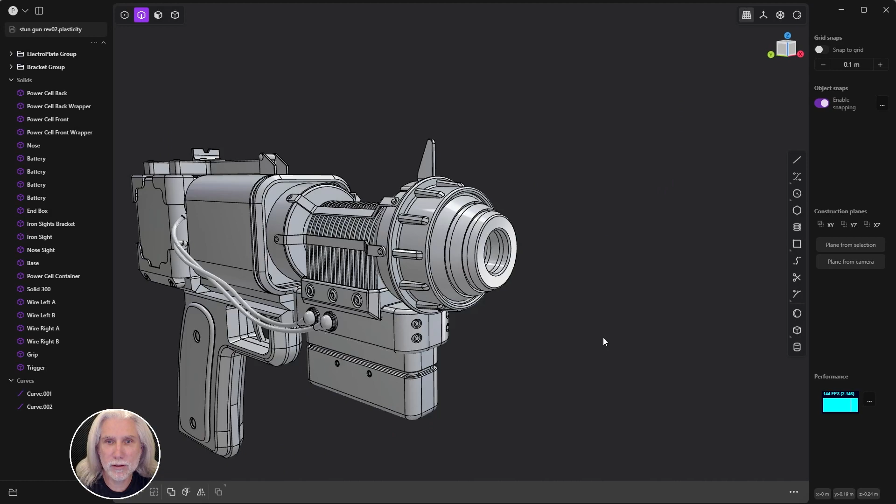This is the final model we're going to be making in this tutorial. I've divided this up into about 7 different half-hour sections. I know that's a lot, but a half hour at a time is plenty. I usually get through one or two of these components per session. Altogether it's like a day. So if you're just learning Plasticity and want to spend a day on a tutorial series, this is a good one for you.

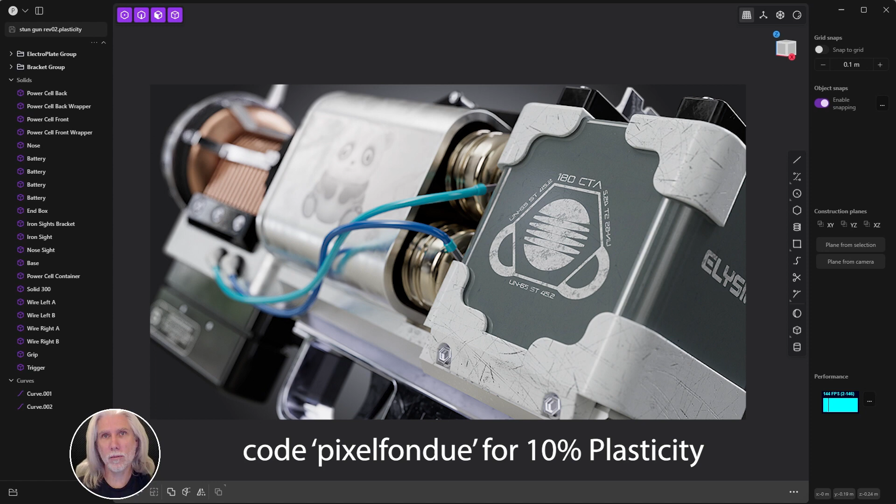Okay, so let's work on those brackets, those side brackets. What's the best way to do those? You'll notice there's this piece here, and then the same piece on either end, connected by diagonal pieces of metal. All right, I think we can do that.

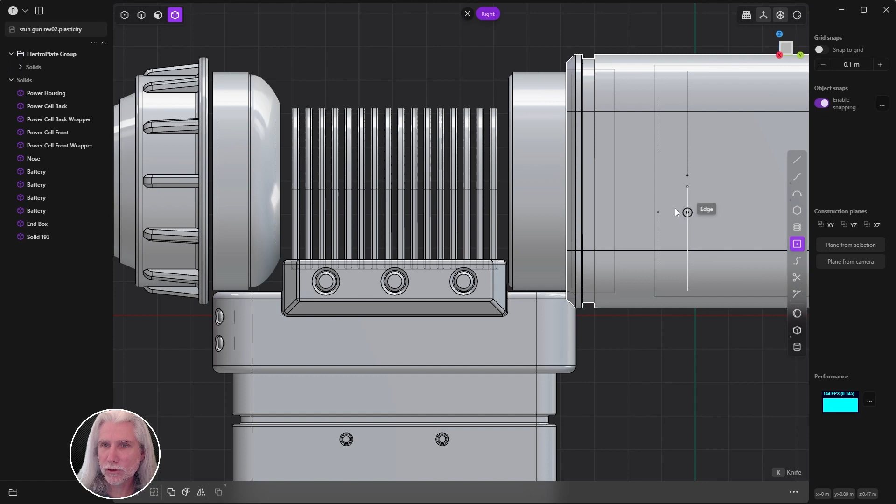Let's go back to Plasticity and look at it from the side. Press 3, and I'm going to go to a center rectangle. Let's see if we can hover over here until it snaps to the center of this guy, just lining it up. Click and drag it out a little bit, just getting a rectangle as a starting place. Hit enter, and you can see the little rectangle here.

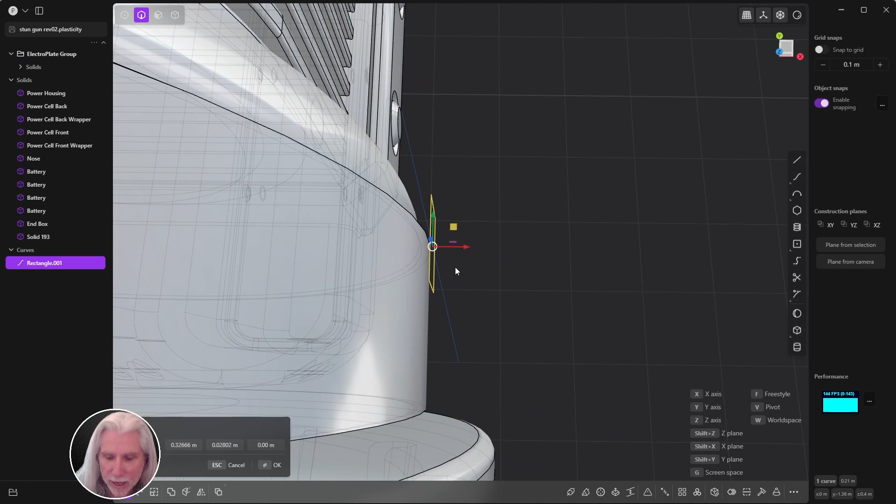Then I'll press 1 to get the vertices, press G and move it over a little bit. Enter, and then G again, something like this. Let me press 2 to get the whole rectangle. I'll go to the top view and move it out to the edge, maybe over the edge a little bit, something like that. Looking at it from the top, you can see what it looks like.

From the side, I'll press 1 and G and lengthen those out a little bit. Then press 2 and select the whole thing, Shift D to duplicate. Now I've got another one, and I'll move this all the way over to this side. Actually, let me Control Z, undo that. Let's Control D to duplicate it and move it over to the middle — this is going to be our middle one.

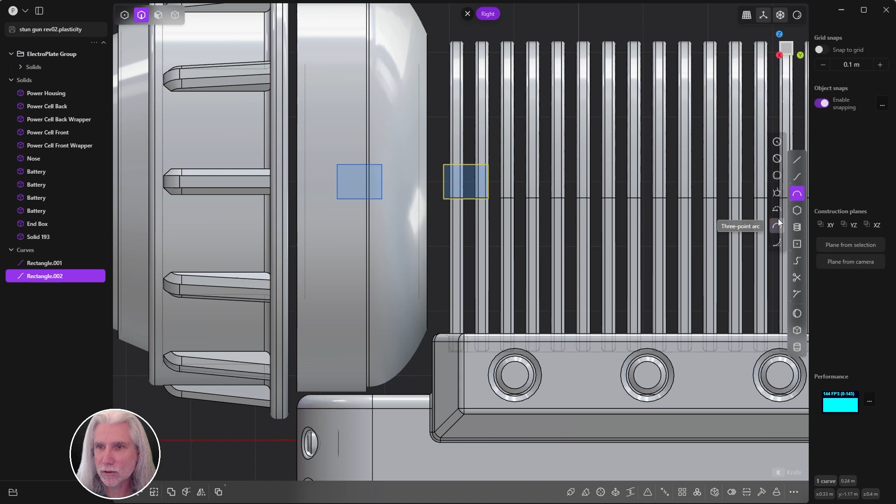Then I'm going to finish up this side with an arc. I'll click on my arc tool here — click and hold, you can see all these tools. Let's do the 3-point arc. Click once on that dot, click once on this dot, then click and drag up to get a nice little arc there, looks like a basketball key. T will give us our scissor tool, and we'll chop out that middle line and hit OK.

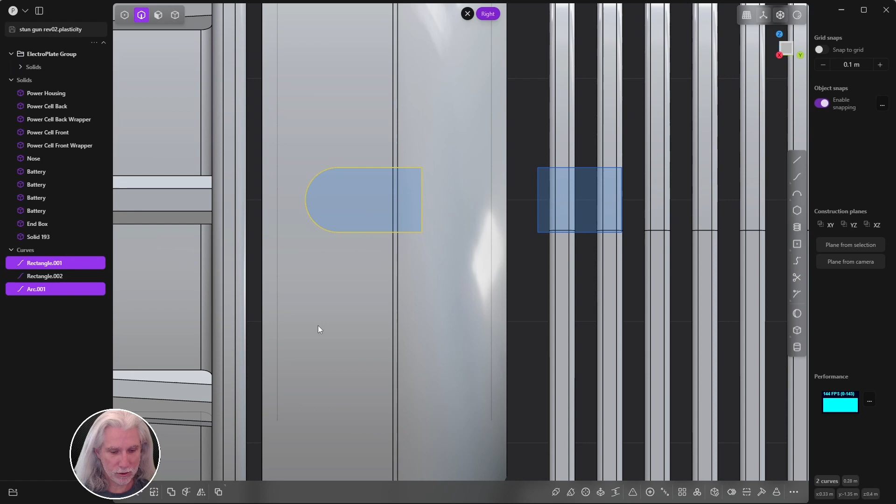Then press 2 for curve selection, select both of these, and J for join. You'll see these 2 become 1 here — J for join, now that's just 1.

Then I'm going to Alt X, which gives me my mirror tool. I'll press F for freestyle, click and drag down, and you'll see it appear over here. Whoops, you don't want it at an angle, so let me press period for isolate — this is a little bit easier. Alt X for mirror, and you'll see the mirror axis is way over here. So we'll go F for freestyle.

I'm just going to click and drag down to create my axis, just like that, and get one on this side. So now I've got two of them. Then I'm going to get out of isolated mode by clicking that.

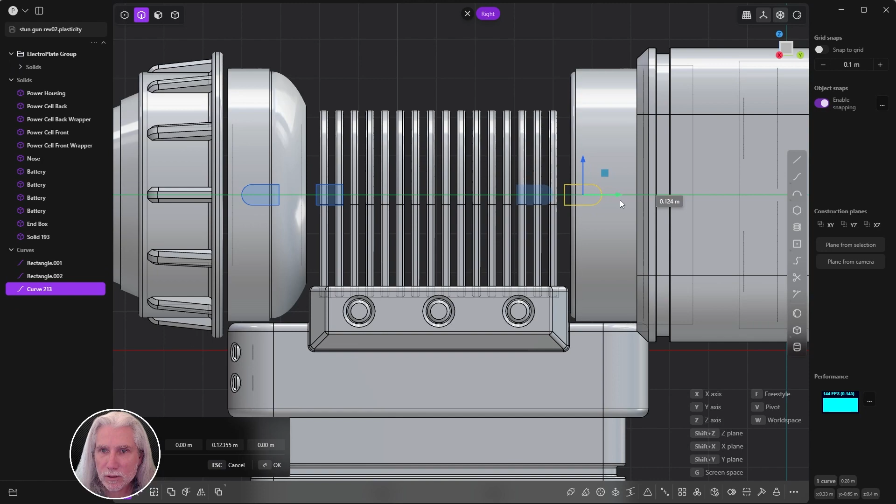Let's select this one that we duplicated here and press G and move it over, so it's a little bit like this, maybe like that, just sort of overlapping that edge.

And then our middle one here, this rectangle, let's look at it from the top, press 7, and we're going to press G to move it a lot closer, and in a little bit, but a lot closer to these metal plates here. So something like this, we'll just maybe test that for now, maybe in just a little bit.

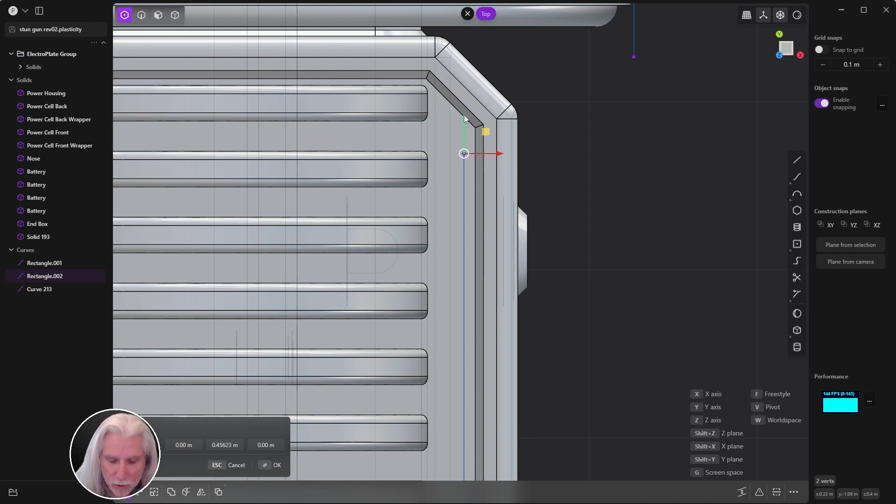We have to connect it to this outside one here, right? And then 1 for control vertices, G, move it over, again just sort of looking at it from the top, just kind of even with the second to last one, I guess. Something like that. Okay, looks good.

And now we can press 3 and select all of these sort of pseudo faces like this. Our extrude tool comes up automatically. Let's look at it from the top maybe, and I'm going to extrude out this way a little bit. So not a ton, it's pretty thin, just something like this. And hit enter.

Now we've got 3 bodies here, right, 1, 2, 3. I don't need these curves anymore, so I'm going to delete them. And now we need to connect them, so I think I'm going to...

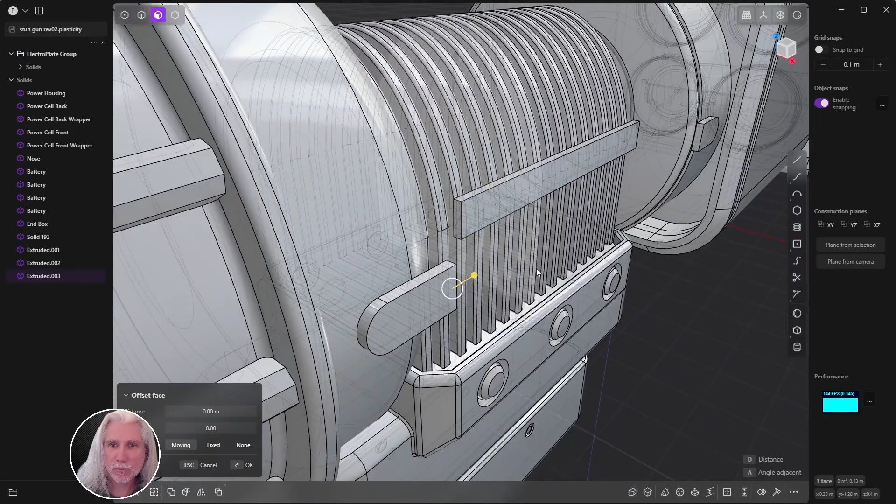Press 3 and push this one out a little bit more this way. Now with this still selected, let's shift select that face. We have 2 faces selected.

And I'm going to loft these together. It's kind of like bridging in Modo or Blender if you use the bridge tool. This loft is going to create geometry between these 2 faces. So down here, it's the L key, or you can click this little loft button, click like that, and you see you've got this nice little curvy thing there, right?

Now if I look at it from the top, you can see the curve a little bit better. In fact, we're not intersecting with this, which is what we want, but I'm not sure I want this curve. So I press period again to isolate, and then it seems to have cancelled that command, so press L again and get that loft.

Over here we have our continuities, and this will help us determine the curviness of it, so I can adjust the tension. I can click and drag, and you can see that tension sort of moving in and out there. One from this one right here will be the tension of this side, so you can see what I'm doing, and this one is the tension of this side.

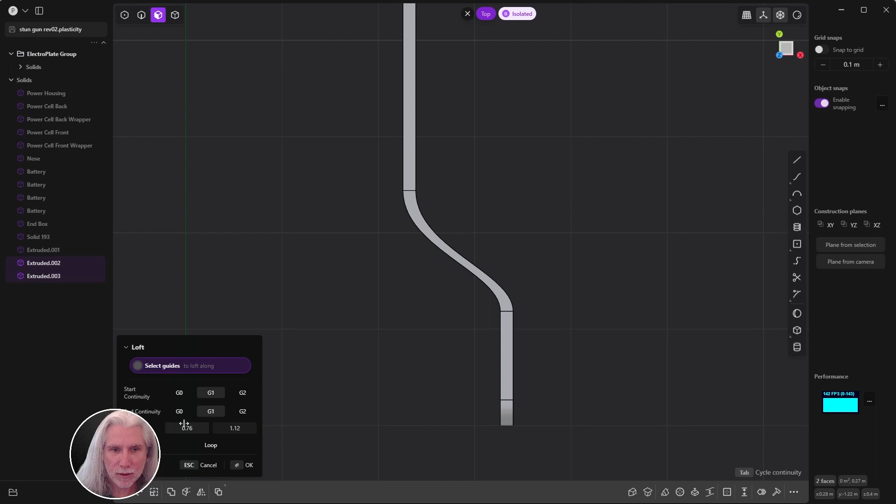But I think I want it straight, so you can do these sort of built-in ones, G1, G2, like this, or you can go G0, which is just linear, like that. And I think I'm going to go linear, and then we'll do a little bit of a fillet later on. So hit OK.

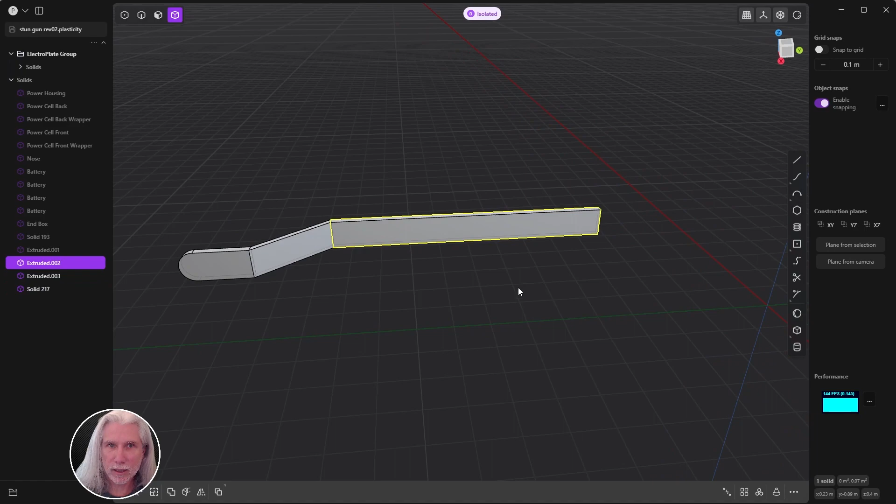So now we've got this, it created a new solid, it didn't connect the solid. So now we've got multiple solids here. We've got, press 4, we've got this solid, we've got this solid, we've got this solid. And when we get out of isolation mode here, we've got this solid, right?

So we're going to do the same thing over here. Press 3 for face, select this face, select this face, L for loft. Boom, gives us the sort of curvy one. We want the G0 straight one like that.

Okay, enter. Now looking at it from the top, we've got our 2 lofts. I think that looks pretty good, and we just need to do a little bit of cleanup work here.

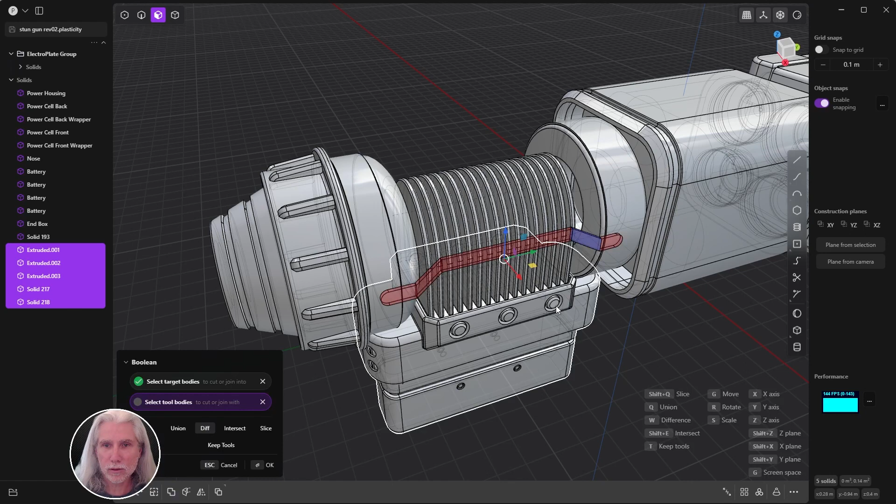So I'm going to grab all of these guys, so down here just shift select up and grab all of these guys. Oops, we don't want the bottom one. All of these guys here, and we're going to just QQ to Boolean union, QQ. And now it's all one piece.

Let's rename this bottom piece here, let's just call it like hand grip or something. I'm not really sure that's a hand grip or front grip.

I don't know, what is that thing? Front grip, we'll call it. Maybe you'll hold it like that.

So this guy here, let's just press period to isolate it, and 7 to look at it from the top. You'll notice that this is a little bit too thin here. Same over here, although it's a little bit better.

So let's just press 3, select these faces and just eyeball it. Look at it from the top maybe. You want this to be about the same thickness all the way across. So enter there, and then select this one. Look at it from the top and thicken that out a little bit so it's thick all the way around.

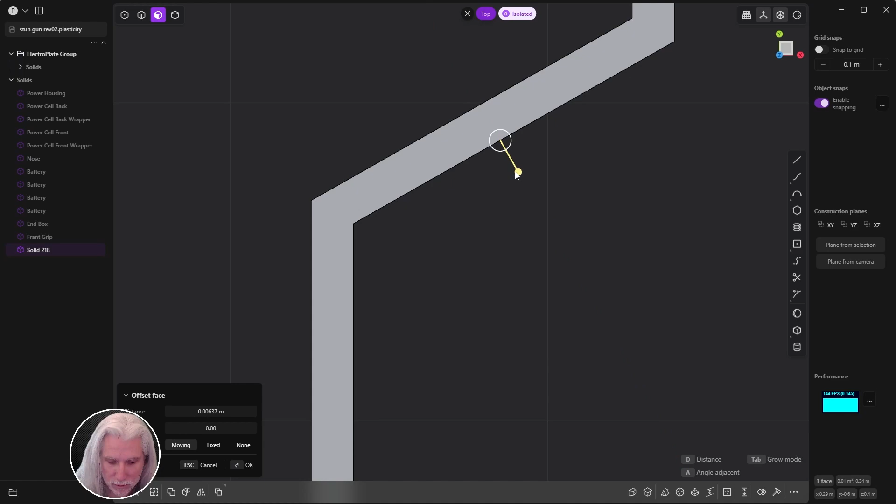Looks good. And now let's press 2 for edges. Let's grab these two and hold shift and grab those two and hold shift and grab these others. And we're just going to fillet these, just rounding out these edges a little bit, right? Just like that. So hit OK.

Looks good. We've got this nice little bracket here. We just need to cut some holes in it right here and right here, and then put in the little bolts, and then we'll duplicate it around.

So let's do that. I'm just going to look at it with 3 from the side, and come over here and create a cylinder. I'm going to hover here and push out, then look at it this way. Let's just sort of push it in like this.

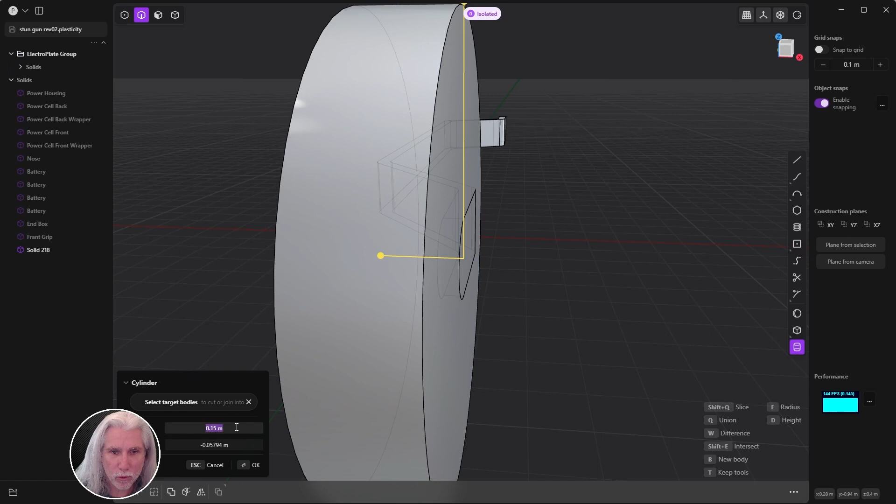Let's type in the radius, call it 0.15, like that, so we can get the same radius on the other side. Hit OK. Let's go to the other side.

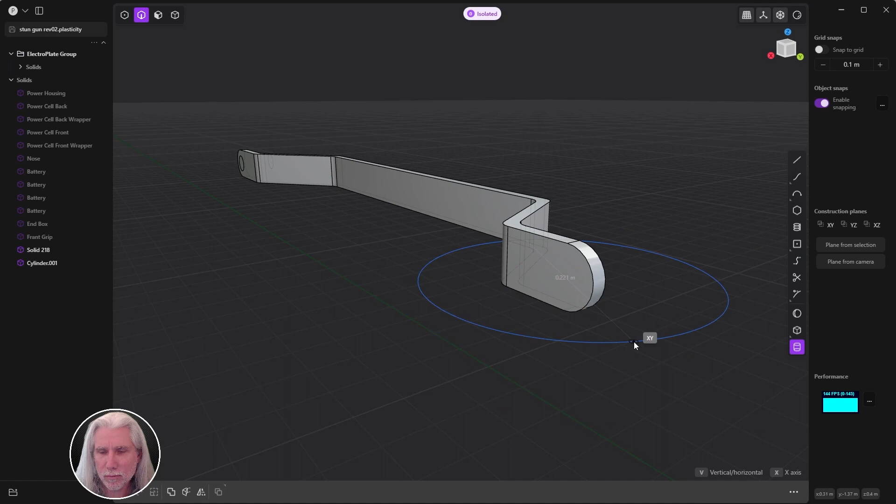Got our cylinder. Kind of hover over that little point there. Now you'll notice like on this side, it's rotated 90 degrees. I want it to be flat on this face and not parallel or perpendicular to it. So here's a way you can do that.

You can just select the face like that and then hit the spacebar, and you'll have this thing up here called a temporary construction plane. What that did is it just moved the whole grid, and it sort of transformed it onto that plane. So now our center of our universe, so to speak, is right there on that face that we had selected.

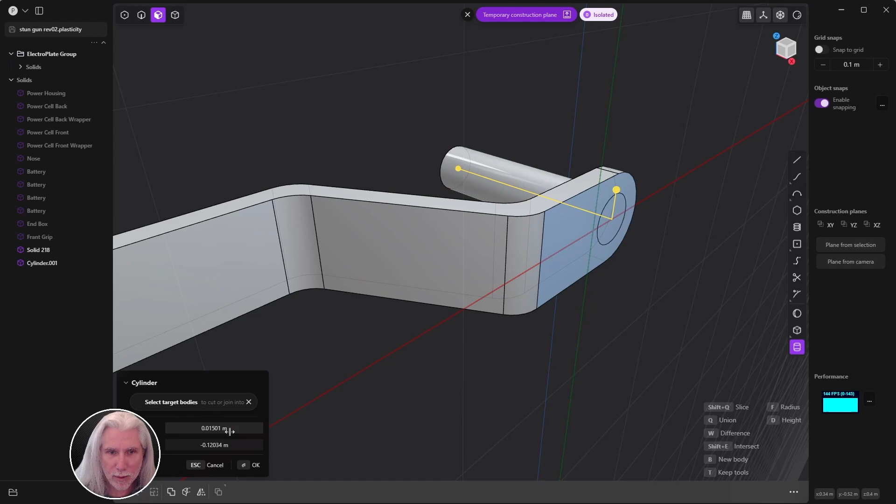And then when I go and make my cylinder here and just hover and click and drag, it's doing it correctly, and I'm going to drag out that way. I'm going to do a new body, just press B for new body. And remember it was 0.015 for the radius, so hit OK.

And so now we have these two guys here. In fact, you can press 4 for body and press G for move and just drag them both out a little bit. Enter, like that. And then to get out of this temporary construction plane, you could just hit spacebar again, or click the X here. We'll click the X, get rid of it. Whoops, let's get our perspective view.

Okay, so now we got two little guys here, and I'm just going to, on this one, press 3 for the face and push it up just a little bit like that.

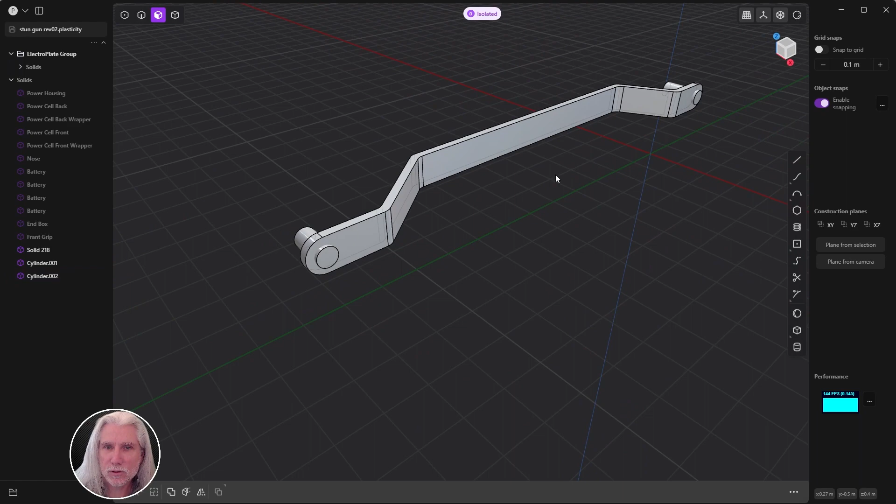Okay, so let's do some cutting. Let's grab 4 for our bodies, and then Q, and we're going to select this one, and then hold Shift and select this one, and it's going to chop our holes into it. And then we want to keep those cylinders because we're going to use them to create the bolts. I mean, why not? We already have them. So T for keep tools. You'll see it turn sort of milky pink. Hit OK. So now we've got holes in there.

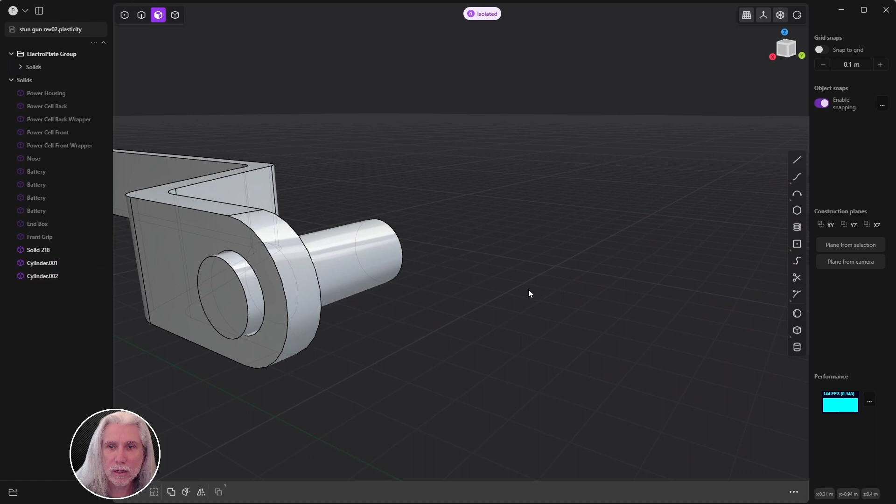And then I'm going to press 3 and grab that face, and Shift and grab that face. And I'm just going to push these in a little bit. So those faces are pushed in. There's just a little bit of a gap. It doesn't have to be a huge one, just a little one, so you can see a little bit of a gap there. Hit OK. And then maybe let's press 2 and grab that edge there.

And this, hold Shift, grab that edge, and just do a little chamfer. OK, like that, and yeah, there we go.

So now let's press period, get out of this, and first thing we should do probably is mirror this thing. So let's...

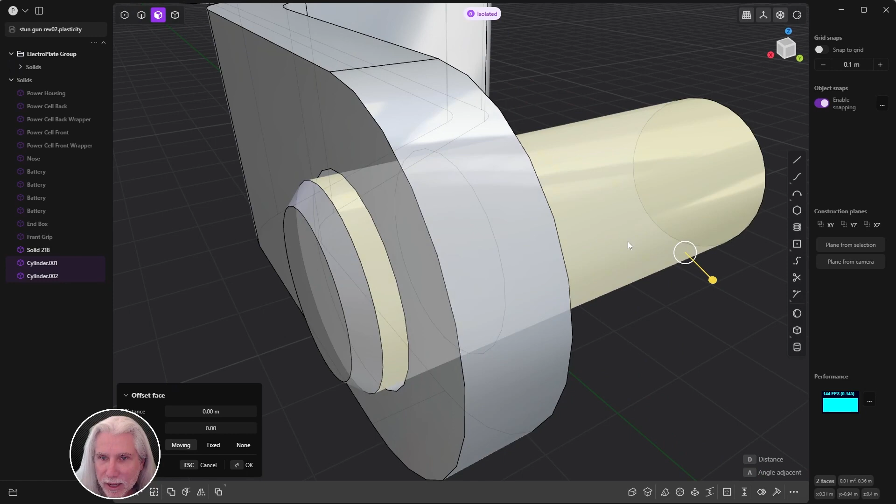Grab these 3 guys, and I wonder, I think I'm going to Boolean these together. I just don't want so many different objects here. So let's press period again, isolate them, and you know what I said about creating the gap? Let's undo that. So select, hold Shift, select both those faces, and then instead of having a gap, I'm going to click and drag so it actually intersects there like that.

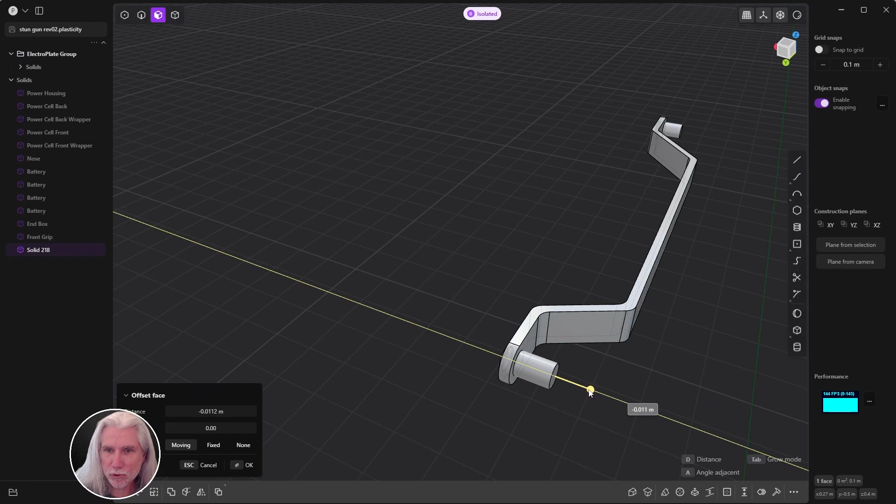Enter, and then 4 for bodies. I'm going to select 1, 2, 3 bodies, and then I'm going to press Q and Q again for union. Hit OK. Now they're all together, and we can just press 3 and push this one back a little bit, maybe like that. Let's take a look.

I don't know if those should be, let's see what those look like. Press period. I guess it's pushing it, clicking into that, going into that. I think that's fine. Okay, so now we just have this one bracket to deal with instead of a bracket and 2 little bolts. I think the little gap wasn't worth it. So let's just put them all together.

Again, in polygon modeling, if you're in Modo or Blender, Maya, whatever, you can have a one polygon item, which is just a container for polygons, and have separate polygon islands that aren't touching each other. To have a solid in Plasticity, everything has to be like a watertight solid. Things have to touch, right? So that's what we have here.

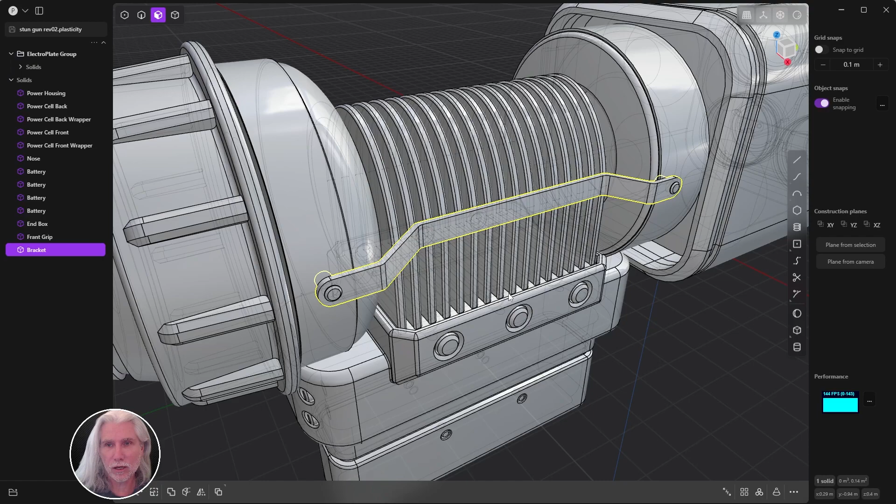So I'm going to press V for mirror, or I'm sorry, Alt, not V, that's Modo. Alt X for mirror. And then I'm just going to click on this side, boom, like that. And we'll get one of those guys over there, enter. And then now we just need the ones kind of up top here.

So I'm going to do that by doing a duplication and a rotation and then a mirror. So let's grab this bracket. By the way, when you duplicate something, like I duplicated this bracket, I wish it would call it bracket 01 or bracket 02 or whatever, instead of just solid, but I'll rename them in a second.

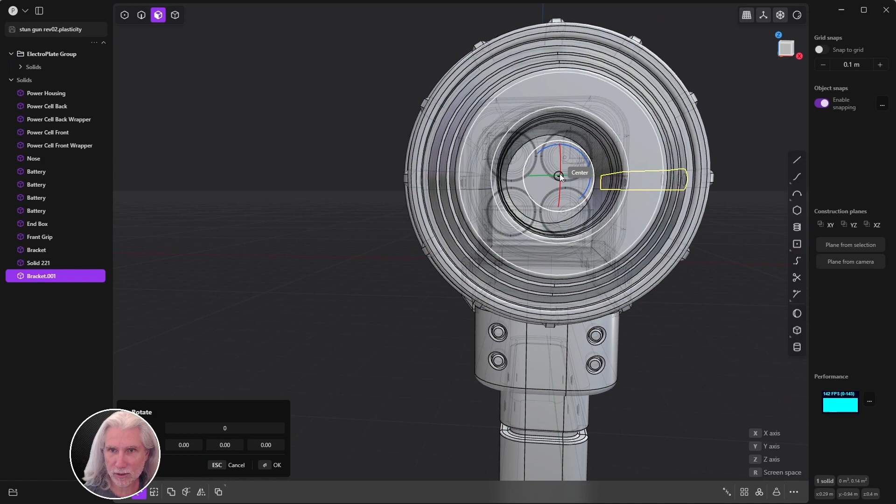So we got this guy, so Shift D to duplicate it. Now there's 2 of them in the exact same place there. Press R for rotate, and then F—I'm sorry, R for rotate, and then V for pivot. We're going to change the pivot of a rotation to the center here. So in fact, you should just see all these little dots there. So click that. And now our rotation is at the center of these cylinders.

And so when I rotate it, it'll just sort of keep it on the edge of that cylinder like that. And so, I don't know, something like maybe between, let's look at it from the front, press 1. Maybe sort of between these two guys here is the best. So something like that. I don't know what angle that is. I can't, yeah, okay, something like that. And then with it still selected, we'll just do Alt-X again and then click there to bring it over to the other side. Okay, and now we've got our four brackets, right?

All this little detail just starts adding up and making this look a lot cooler. So we've got our 4 brackets. Of course, they're not all named bracket. Also, I should be able to right click and rename bracket, and it just renames them all bracket 01, 02, 03, 04. I mean, that's a Modo thing, but Modo's really good at that type of stuff. So instead I have to double click it and call them all bracket, I guess.

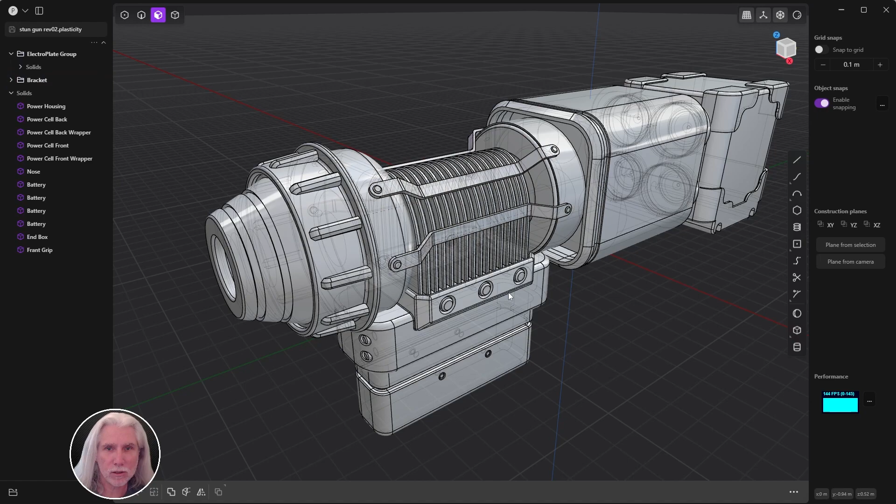Looks like I did rename one of them. Anyway, I'm just going to select these 4 and group it. We'll just call this bracket just to clean up our item list over there a little bit. So we got a bracket group. Bracket.

Group. Okay, don't have the little slash at the end. Control S to save.

Let's move on to the top sights we should do next. Looks like several pieces: one flat piece, kind of like a big T or double T. We can create the profile with curves, extrude it, and do a fillet. Then create a couple shapes with curves and do some Boolean work, plus a profile for this iron sight.

Let's select this face and press space. That makes a temporary construction plane at that top face.

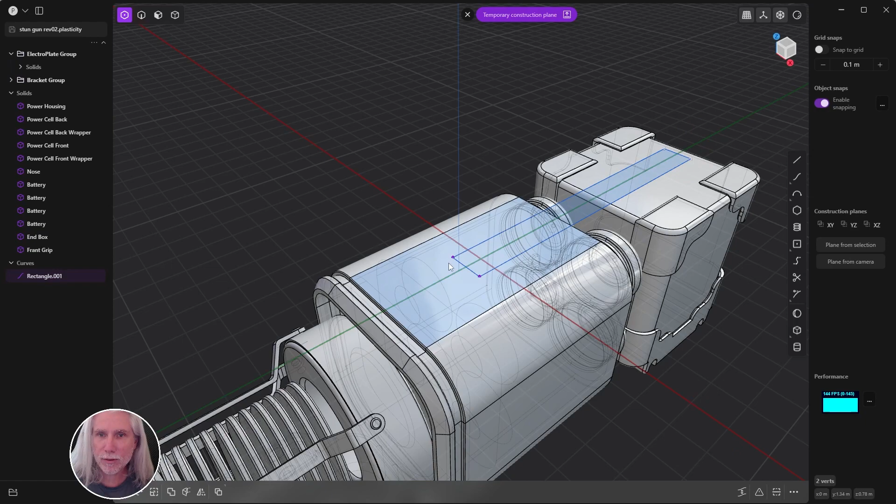Let's do our center rectangle, click in the origin and draw it like a square. We'll adjust it by pressing 1, selecting these vertices, and G to move them into place, all the way back, then kind of in the middle of that piece.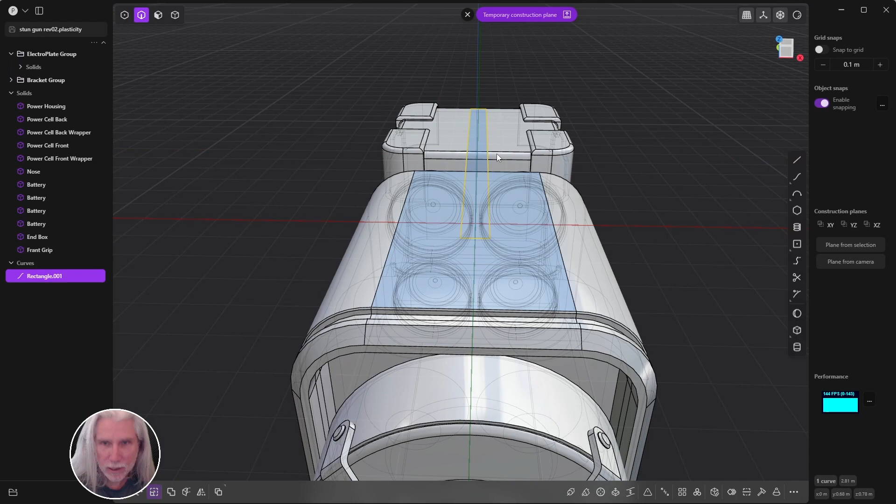Press 2 to select the curve. S for scale, let's make it a little skinnier, maybe not super skinny, something like that. Enter, and let's create another one.

Again, center rectangle from the origin, make a rectangle coming out and press enter. G to move it way up here, grab that little Y-axis handle and slide it along the top.

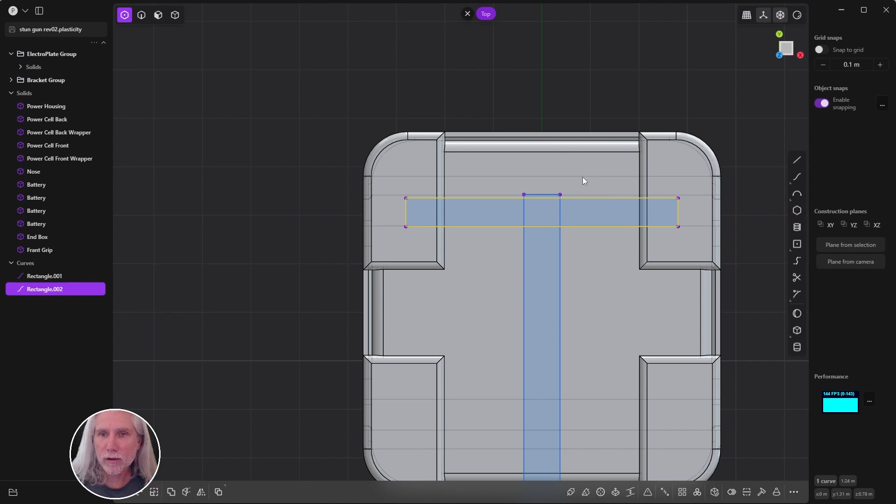Let's look at it from the top. I want it centered on these pieces since it's going to connect to them. S for scale and move it out like this. Enter, then 1 for verts, move these a little farther along.

2, select that rectangle, Shift D to duplicate, move down to here, eyeballing it in the middle of those pieces. Then press 1, grab the verts, and G to make them a little thicker, just eyeballing it until it looks right.

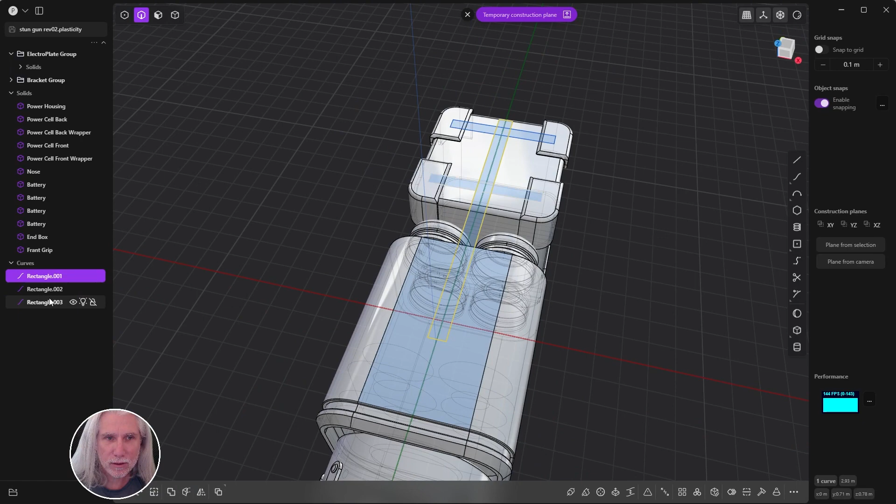These pieces connect to each of these, like the little cross T's that are welded onto the battery pack or whatever this back part is. Let's grab all 3 of these and press period to isolate it.

We can click out of our temporary construction plane now. They're all on the same plane, which is good.

Press T for trim and chop out the middles here, boom boom boom. Looks good. Then select all these curves and J to join, so now it's just one big curve.

Press 1 to select all the verts, then B for bevel/fillet, to get those nice little rounded edges. Hit OK, that's basically what we want.

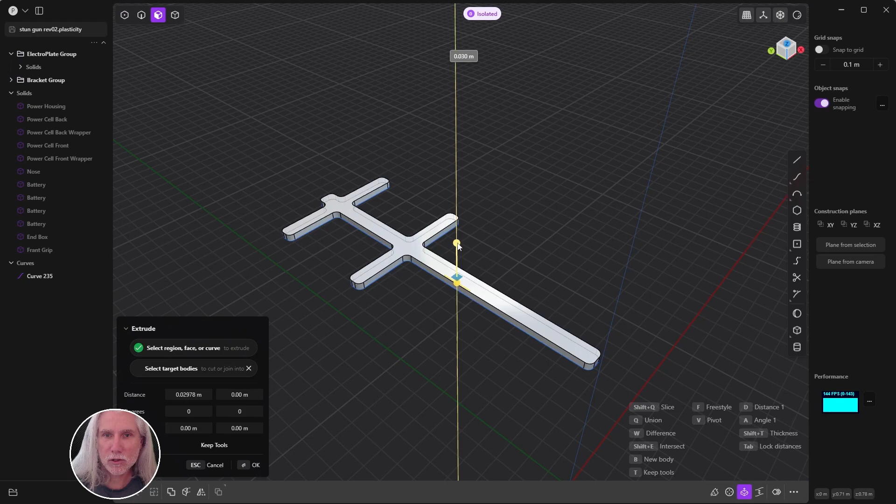Press 3 for face mode, hover over this to get my extrude, and pull it up. Hit OK, and there it is. Press period to get out of isolation mode.

I don't think I need this curve anymore, so we'll delete that. We'll just call this sight base or something along those lines.

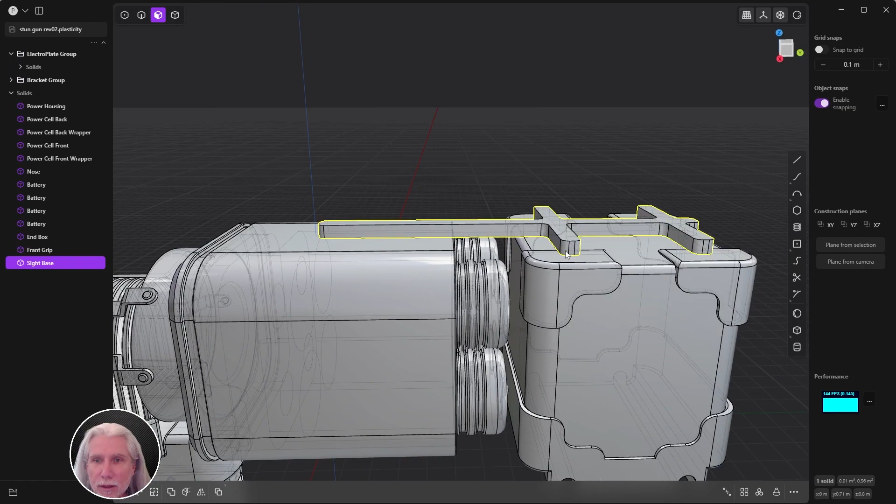Press 3 and grab that top face, Control 2 to grab the boundary edges, and round those down a little bit as well. Then I think we want to push the bottom up just a little bit.

Press 3, get that bottom face and push it up just a little bit, because looking from the side we want a gap there since it's welded on, creating some mushy weld marks. Not something I'd normally do in plasticity, but we'll give it a shot. Something like this, hit OK.

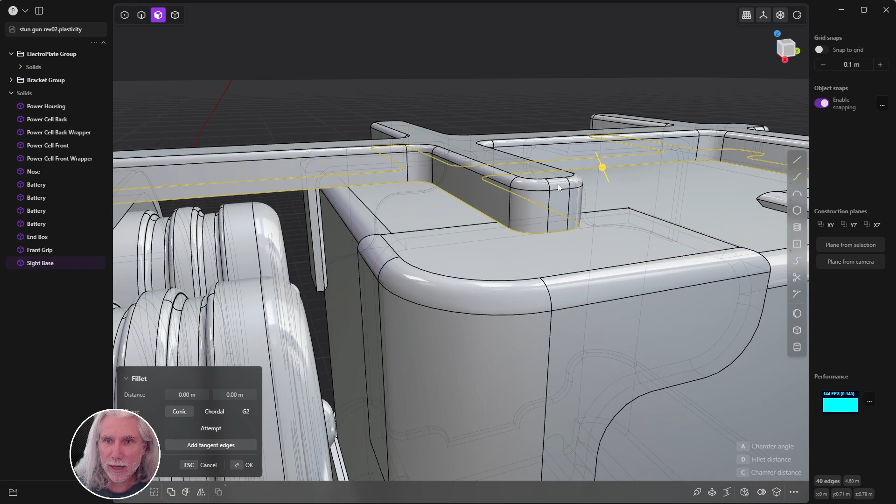And then Control 2, let's just match that fillet there. So let's just start our fillet and click and match it. So yeah, just something like that. Hit OK. All right, so we've got that part.

And taking a look here, we've got this part. It's a little bit taller. Maybe I'll make it a little bit taller.

Let's create this end part here, and then the sides as well. So back in Plasticity, look at it from the side. What did I say? A little bit taller, press 3, and just push that up a little bit. We're just eyeballing things.

All right, so let's get our little side thing going on here. I'm just going to press 3 to look at it from the side. And let's take a look at the reference one more time. It's just basically a wedge shape there.

So let's just create a corner rectangle. I'm just going to drag it over here. I'll just create it over here and then sort of move it into position. So press 1, G, get that moved down a little bit like that.

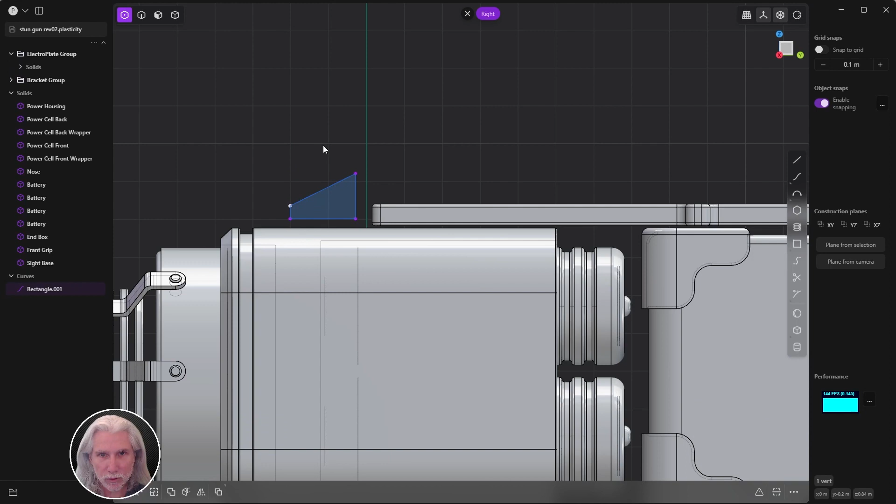And maybe the top one, let's do a decent sized rounded fillet like that. Move this down even a little bit more. And then just these 3, let's do a much more subtle sort of fillet like that.

Okay, looks good. And then, yeah, we're just going to press 3 and select that. It pops up the extrude tool. We'll just sort of extrude it out a little bit. Enter. Select this face, Control 2, gives me the boundary edges.

Double click escape to drop everything. We don't need this rectangle, even though we extruded it, still exists. We don't need it. Let's just delete it.

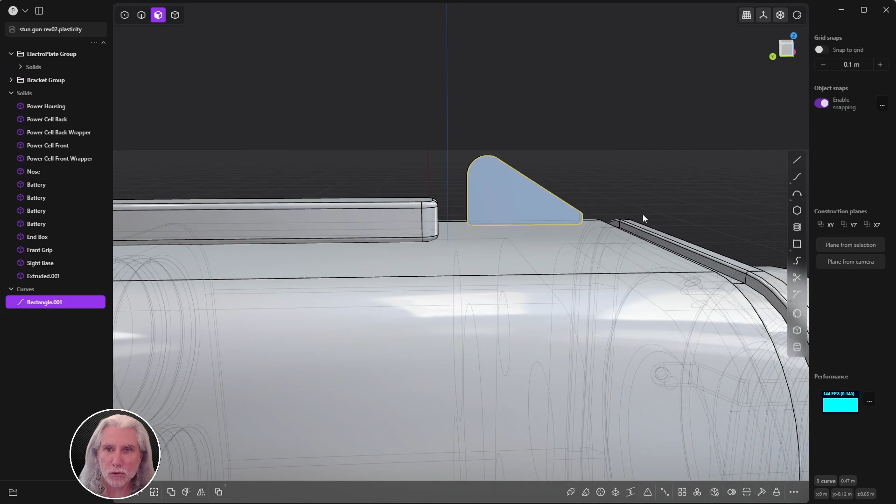So again, select the face here with Shift, Control 2 to get the edges, and I'm just going to put a bit of a rounded edge on this as well, something like that. Okay, and then 4 for the whole body, and then select it, G to move it, kind of move it over. Let's see, is it something like?

I'll look at it from the side. Something like this, I guess. We'll put the little welding parts there as well, but look at it from the top. Maybe more like this, I suppose.

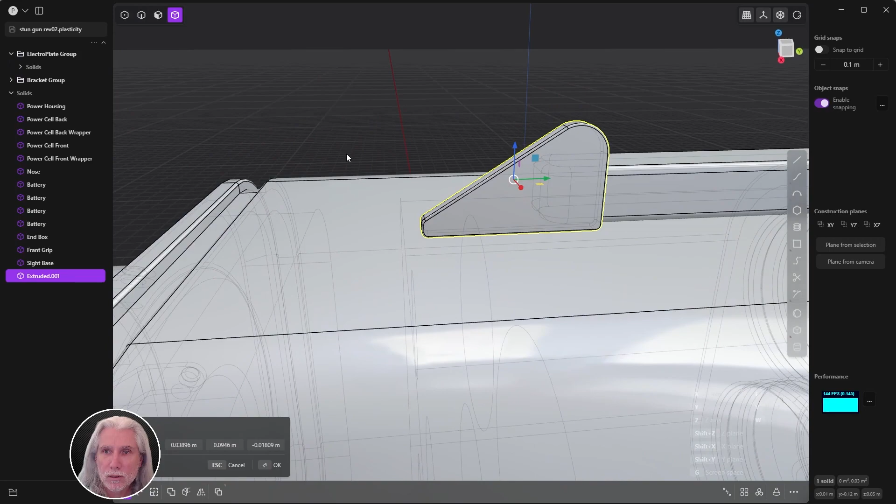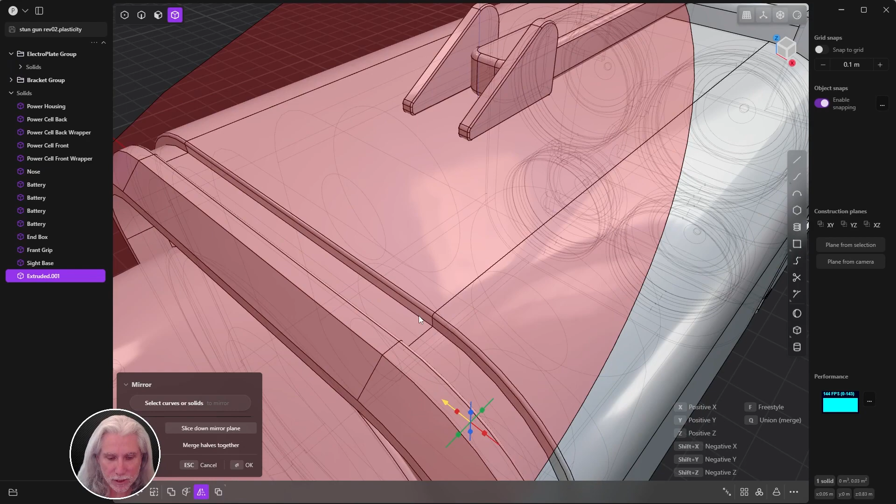Maybe more like this, and we'll put the bolt all the way through it. So something, yeah, something like this, I think. Enter, select it, Alt X, and then you can just click the little X axis there to mirror it to the other side. Enter, looks good.

And then we'll just put a bolt through the whole thing to sort of put them all together there. So let's go to side view like this. And then our cylinder, this, and we want to do a, I guess let me hold control, try and get it stuck on that surface over there.

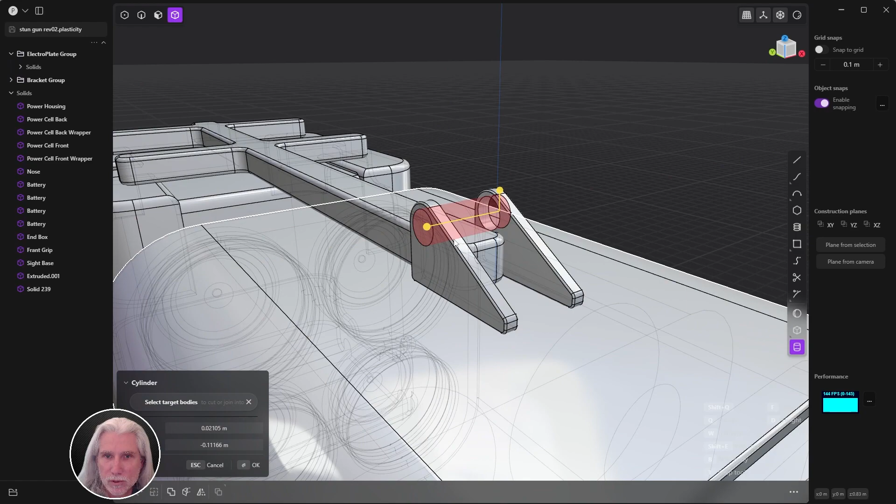And we want to, I think we want to keep the body. So remember that is, I just kind of can't see it there, but it's B, new body. Or I'm sorry, not B, new body. T, keep tool. So we want to do the cut, but we want to keep the tool, so T. And so it's going to make those little cuts, but it's also going to keep the tool there, and then hit OK. And then for this guy, we can scale it out just a little bit like that.

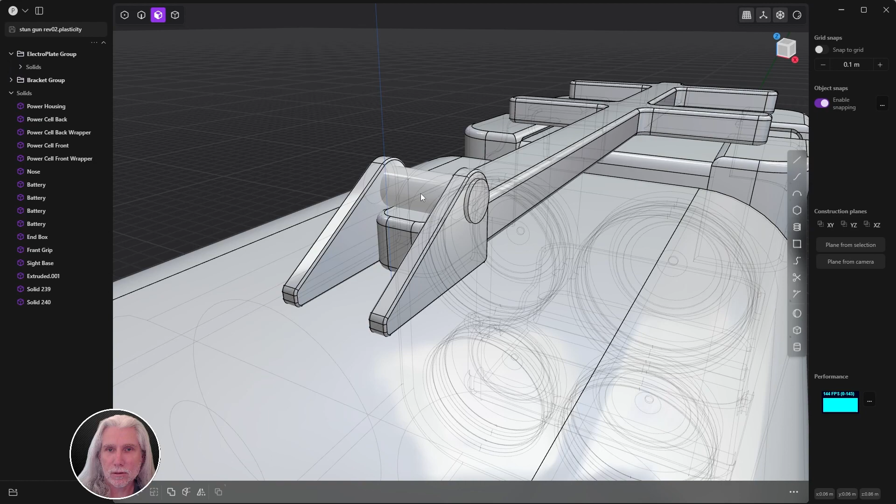And select either edge. Actually, let's actually press 4 and S for scale. Get it out quite a bit like this, and then I'm going to select both of these edges here and start a fillet.

But then I'm going to click the edge of the cylinder, and I'm going to get the nice rounded edges like that. Hit Enter. And I'm going to scale it down, so it's going to flatten those edges a little bit, but also, yeah, I think that looks good, so something around that, hit OK, OK.

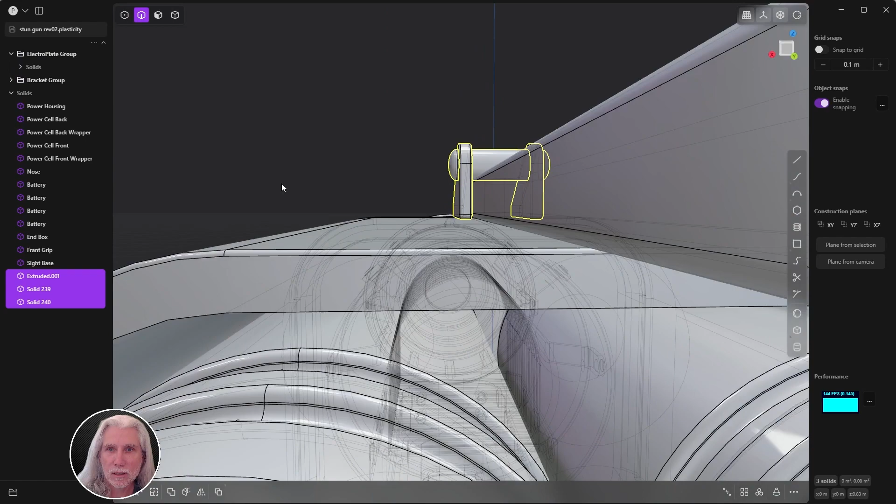So now we've got a bunch of different pieces here. So let's grab this one, grab this one, grab this one, and let me hide those. Wait, OK, Control Z. So let's, I guess we'll just boolean all this stuff together. So grab this base as well, and Q Q.

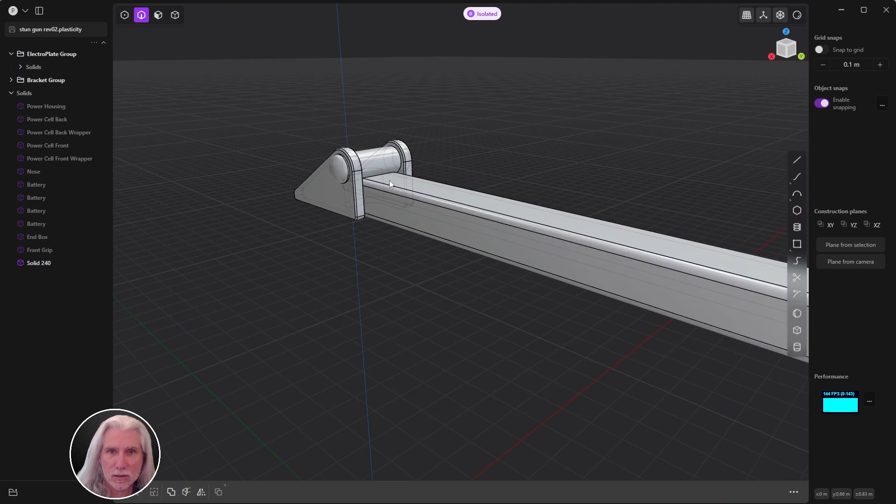We're just going to put them all together, hit OK, press period so we can see it. So yeah, we just put everything together. I don't think we need to do a fillet on this edge, I think it's kind of hidden there, but it's just one big piece now, this sight.

All right, let's look at the reference real quick. The sights are really just a little profile, I think, and extrude it, and we'll chop out the middle there. So, okay, let's do that.

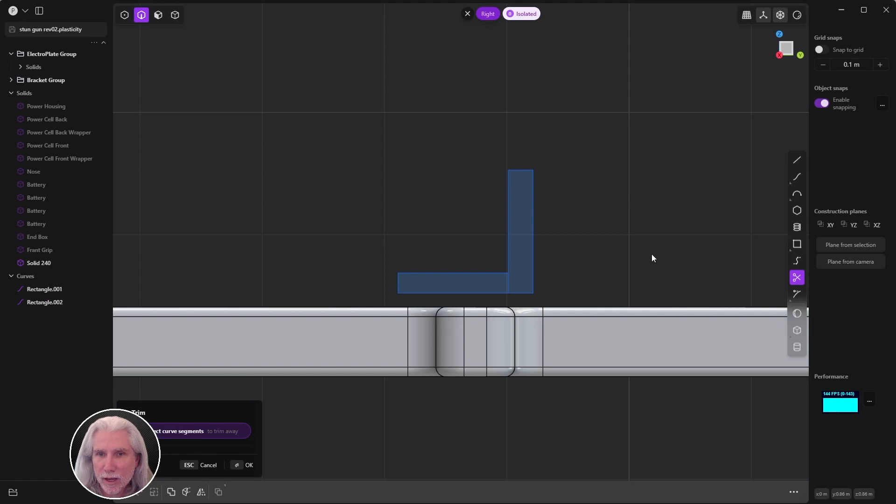Looking at it from, press 3, look at it from the side, and navigate over here. The sight's going to go right here. So again, I'm just going to do a rectangle, like so, Enter, and then another rectangle. It'll snap to that bottom one and kind of go out this way, like so. Enter. T for trim out that guy here, and then Enter.

2, grab both these guys, join them together. 1, select this guy, and let's get a nice sort of rounded fillet, and then we'll round the rest of these. Let's round this one a little more, probably like that, and then these 3 will just round a little tiny bit like that. Hit OK.

And yeah, let's just extrude this bad boy. So 2 selected, G, move it over a little bit to sort of like on that crossbeam there. Enter. 3, select our pseudo face and then scooch it over.

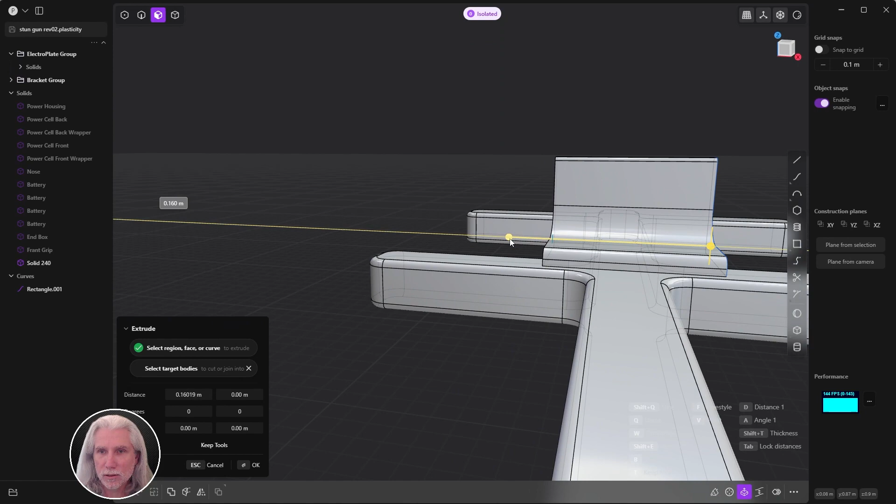This is interesting. How do I know it's the same distance on both sides? I guess we'll just center it in a minute. So let's move it over like this, just sort of eyeball it, I guess. I don't know how to make sure. Oh, I know how to do it. So Control Z, undo. Get it in the middle, and we're going to extrude.

So again, 3, select that face there and start extruding. But then press Tab, and it'll extrude both sides at once. That way we'll know it's sort of the same on both sides. Something like this. Yeah, okay.

It's just the iron sight, probably not that thick. So something like that.

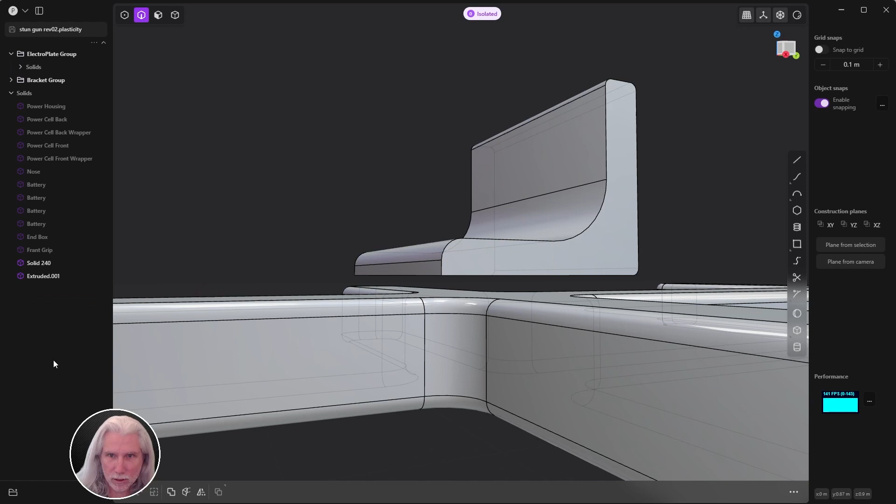Let's grab this edge down here. We can go ahead and delete this curve now. Let's grab this edge down here and just round it a little bit. Whoops. Push in here, round it a little. Let's match this side over here like that. Hit OK.

And then G, I'm going to move it. I'm going to intersect this. Well, no, let's see, let me look at it from the, I guess it's a... we'll move it down close like it's welded. So not quite intersected, but kind of like this. And then Enter.

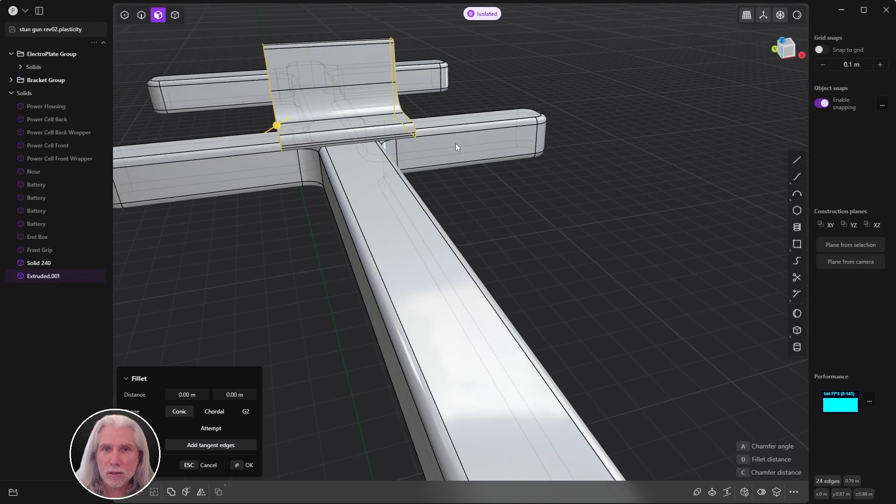Grab both these faces here, Control 2 to get the edges. Maybe chamfer those, instead of rounding it. Okay, and then we just need to chop out that middle part.

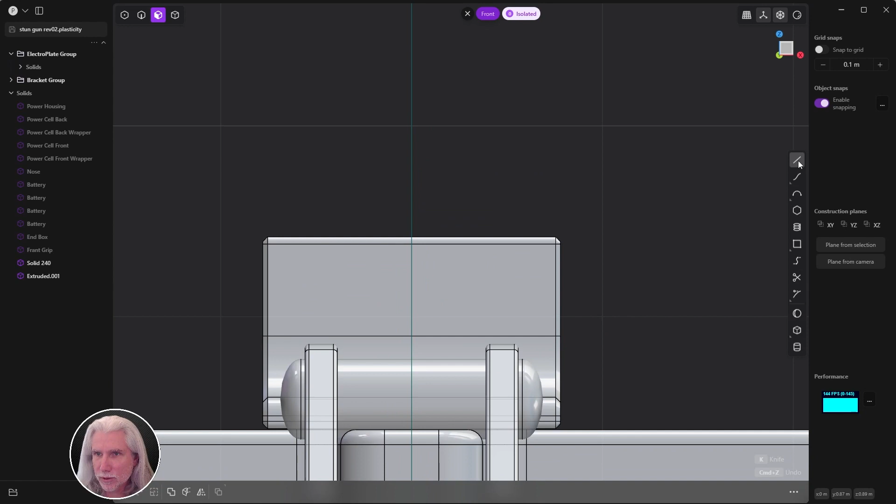So let's look at it from the front. And let's just do a line here, and I'm just going to drag down, go to the middle like that. And then I'm going to Alt X, and I'm going to mirror it over like that. Enter, and then select them both, and then J for join. And then I'm just going to have this curve selected here, C for cut, select that guy, hit OK.

Let's delete that solid from the middle, and then we can delete our curves here. And I suppose we can grab this guy like this, Control 2, match that, just click and match that chamfer so we have it nice and even all the way down.

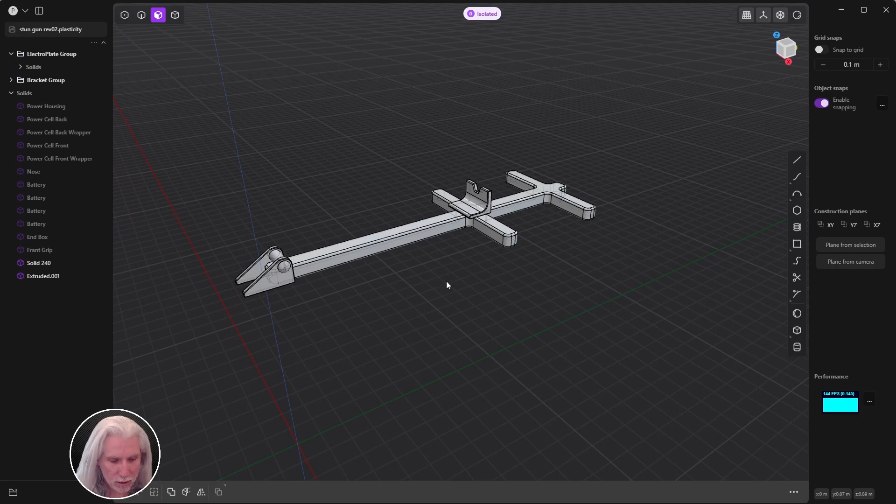I think that's it. I think press period. I think that's our sight. It's not quite as chunky as the one in the reference maybe, but I think that's okay.

Oh, we need to get some screws. So screws here, here, here, here, and then these little weld things. This is the type of stuff that you would do in like Modo, where you just sort of make a cylinder there, taper it on one end, and then subdivide it and use the sculpting tools to get the lumpiness.

Oh, we'll just do, I know what we can do, like a revolve here just for the fun of it. But yeah, those sort of welds you get here, that stuff's just better done in a polygon program. But okay, we'll do it in here.

So look at it from the top, press 7. And I'm just going to do a Boolean union, I'm just going to add this on here. So maybe we'll just start in the middle here so it's centered. Click. And then B for new body. Whoops, what did I just do?

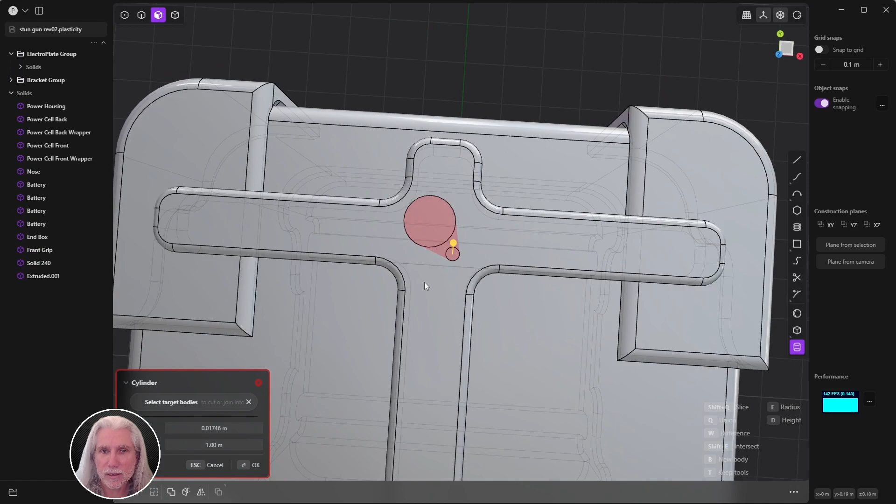Click and drag, and then Alt here like this. Let's do B for new body, and then squish this down, enter, G, let's move it back up into place here like this. So something like this, move it over to this side.

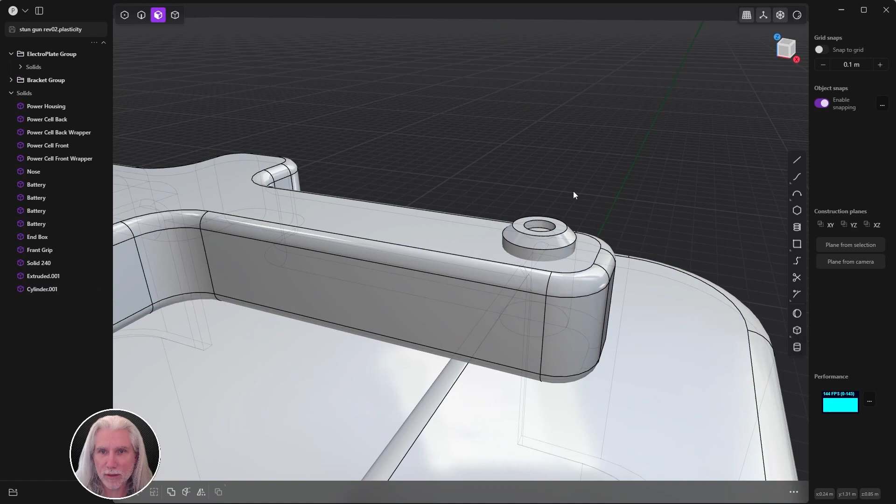Push it down, let's grab, enter, grab this edge here and do a chamfer like this. Then the top, enter, select the top face, O for offset, push it in a little bit, enter, and then grab that middle one and push it down a little bit. Just a little bit of detail. Then select that and press 4 and select the body, Alt X, and get this mirrored over like so.

Enter. And then with both of them selected, Shift D to duplicate them, and the move tool comes up automatically. Let's just eyeball it and move them over to this part, like so. And then I'm going to grab all 4 of those guys and our solid here, everything but the iron sights, and then Q, okay, they're all just one big piece.

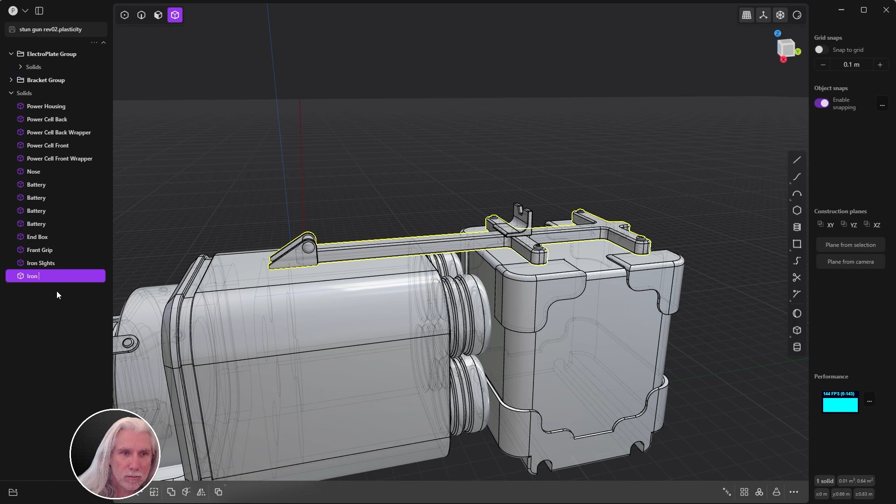And then we're going to call this one iron sights, and this bracket below it iron sights bracket. And yeah, to get the little, let's look at it from the side. I'm going to grab both these and just move them down a little bit. Yeah, I'm not going to do the welding, we'll just do this. We're going to keep it nice and clean like that, I think, for now. I think that's good enough.

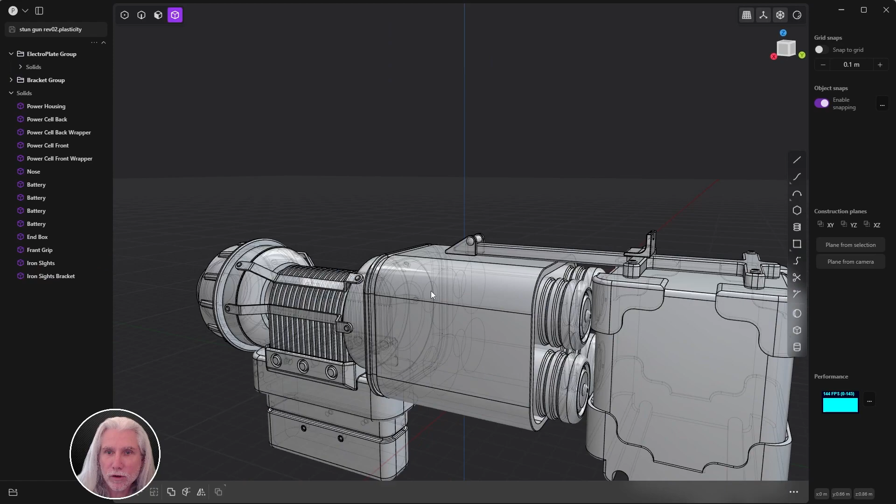Okay, so now we just need to really do this bottom piece here, with the trigger cut into it and the handle, and then I suppose these clips and this bracket and these little nodules here. So why don't we do maybe let's do the wires and the bracket first, and then we'll just wrap everything up with the handle.

All right, I think I'm gonna adjust this top part. This just seems kind of too small for me, these sights here. So let's see if we can beef it up a little bit. I'm gonna go to 4, body mode, select these 2 here, G for move, and just move it up a little bit. Got it from the side, press 3, maybe like this, and then I'll press 3 for face mode.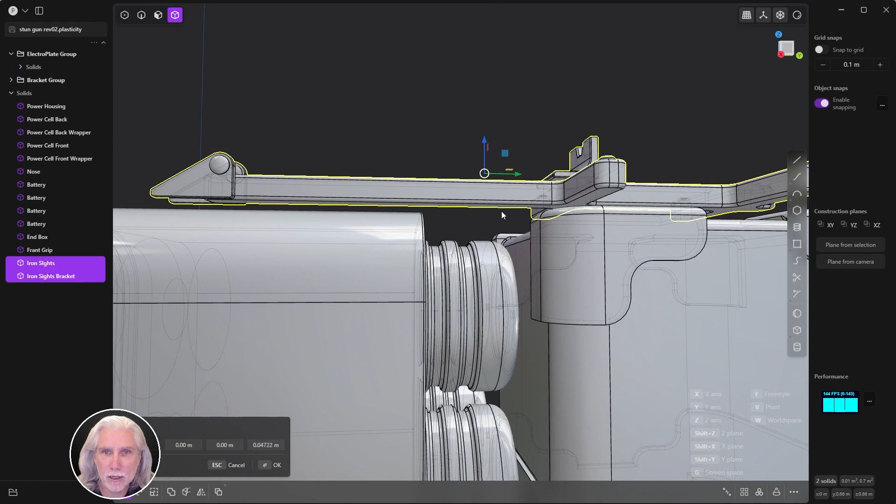Enter to confirm that. Then press 3 for face mode and grab that bottom face and just push it back down, looking at it from the side here. And then enter to confirm. Let's maybe see if we can beef up these sides a little bit.

Maybe select all 4 of these faces and see if we can just push out, thicken them up. In fact, let's grab these 2 back here while we're at it, and let's just thicken everything up a little bit. Just a little bit chunkier. I think that's better.

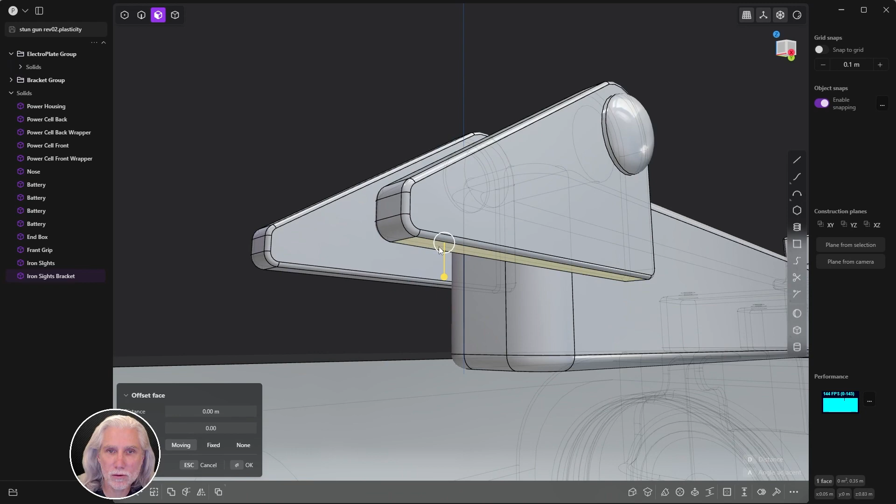Okay, let's get the bottom of these guys, these 2 triangular sights, back down. I think I should be able to press period to isolate. Can I select match face and click here? There we go, looks good. Okay, and include the press period to get out of here. Whoops, press period to get out of the isolate.

And then should make the iron sights a little bigger maybe. Select both sides and just widen them out. Is that going to work for me? Do I have to do... Sometimes it doesn't play nice with the chamfers. Yeah, so let's see here.

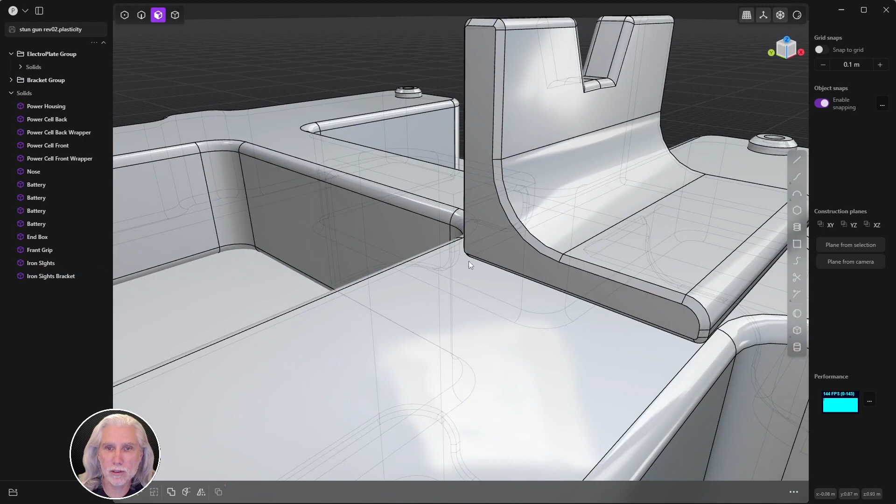Let's grab, hold Shift and Alt and get that whole loop there. Let me try that one more time. Shift and Alt, get that whole loop. Just Shift to select the big one to get that facing that way again. Okay, it's just gonna make our chamfers non-existent, but we'll put them back on there.

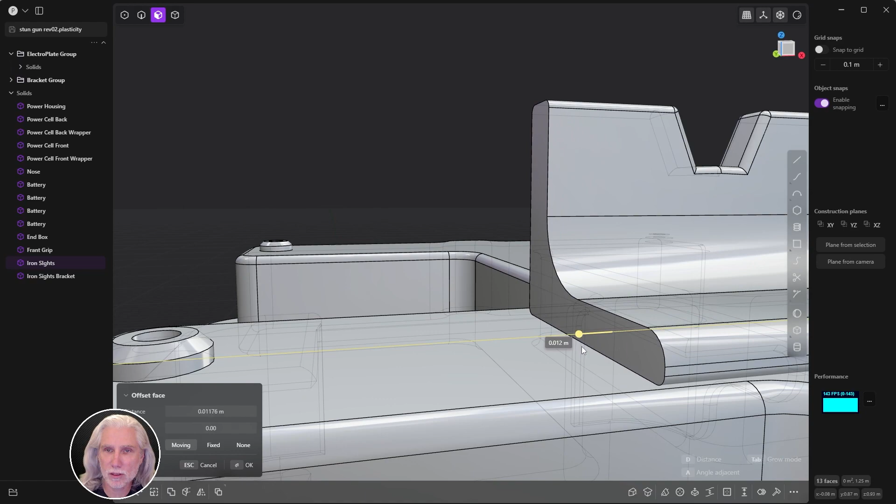So let's just select both of these, Shift Alt to get the loops, and then Shift to place the handle back on the planar one there. Make it bigger, and then enter, Control 2 to get the outline edges, and then just chamfer that one more time. Hit OK, and yeah, I think that looks better. It's just kind of everything's just a little bit chunkier.

Maybe even make let's see if we can make these things a little bit bigger as well.

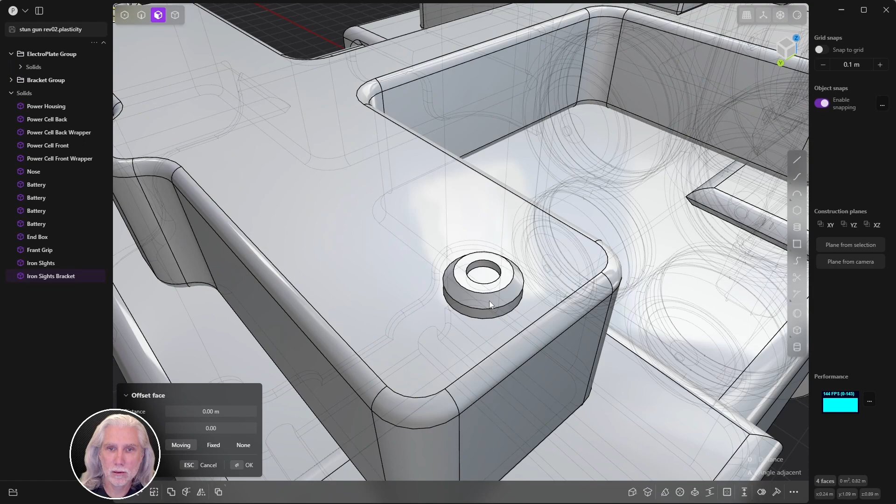Just shift and select each of these faces, push out on them. Yeah, something like that—just bigger. I think that looks better, everything's a little bit chunkier. That one's fine. Press enter to lock that in.

I think we could maybe drop a couple more of these guys on here. So I'm just going to select this face, this face, this face, and shift—oops, get that inner one as well. Get all those faces, shift D to duplicate.

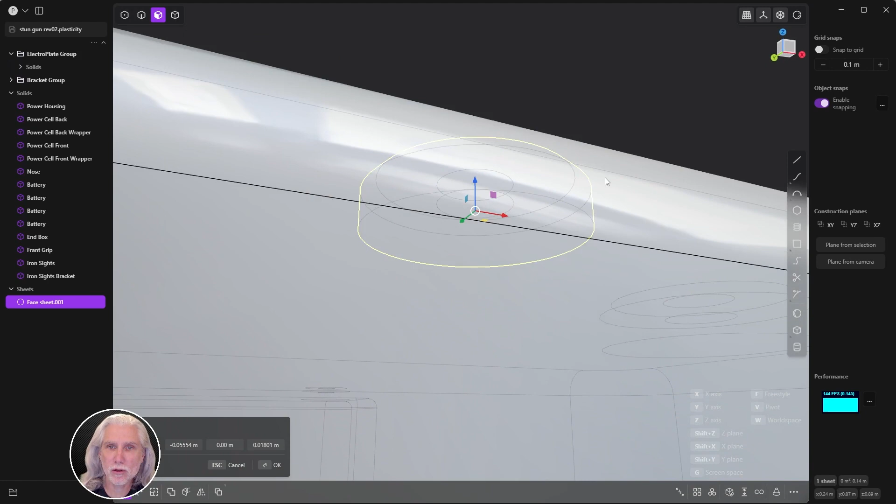And right now it's a sheet. If I look underneath, it's hollow, so it's just a 2D object right now, not solid. I'm just going to press period to isolate it. So let's press 2, get that bottom circular edge there, and we're going to patch it. Click on this little icon here, patch holes, boom. Once I hit OK, you'll see it become a solid. Boom, now it's a solid, right? Even though it has sheet in the name, it's under the solids.

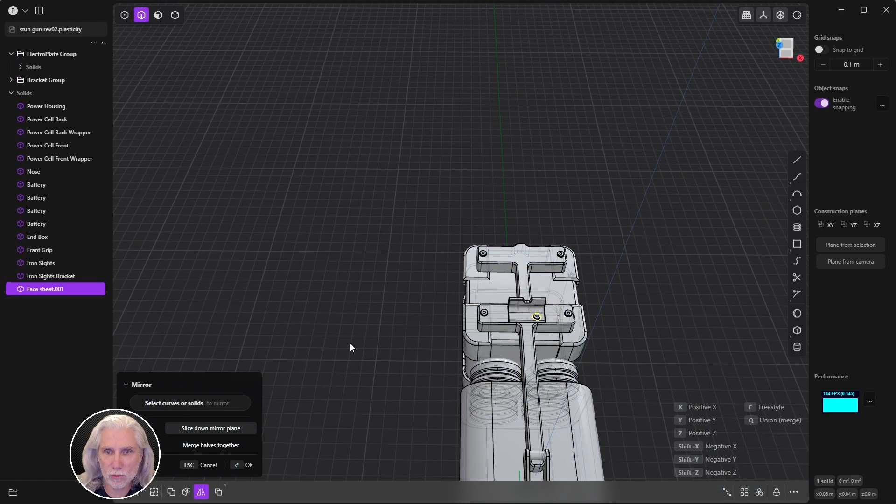Period to get out of here, and then G to move. We're just going to position this back over our iron sight here. Dip it in a little bit so it's intersecting—yeah, something like that. Then OK, Alt X to mirror it. I'm going to mirror on X there. OK, now I've got two of them, so three bodies.

Select all three of these guys, all three of the bodies there, and then Q again for union, and we just boolean them together into one, and we'll name this iron sight. Okay, looks good.

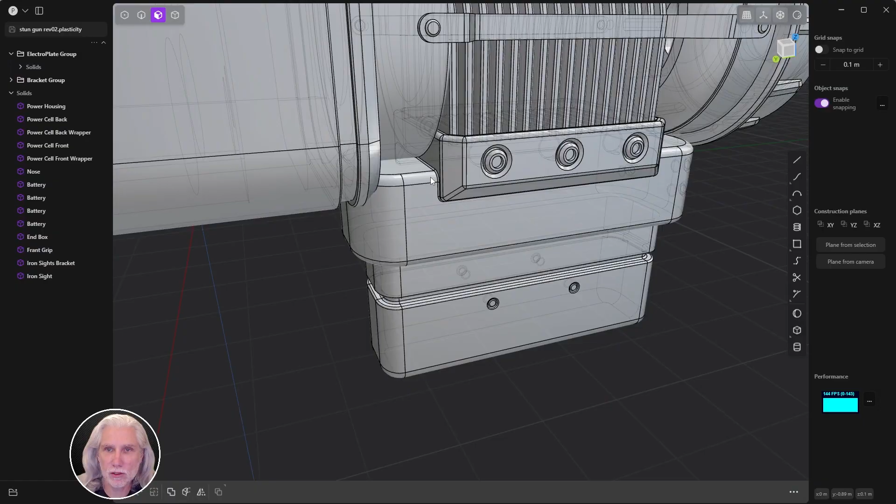I think I should want to add some more detail to these guys, just like a little indentation there. So select all three of them, press O for offset. We're going to bring it in just a little bit, enter, and then push them in a little bit like that, enter. I don't think we need to chamfer those edges, I think they're fine. So I just wanted a little more detail on those. I think that looks good.

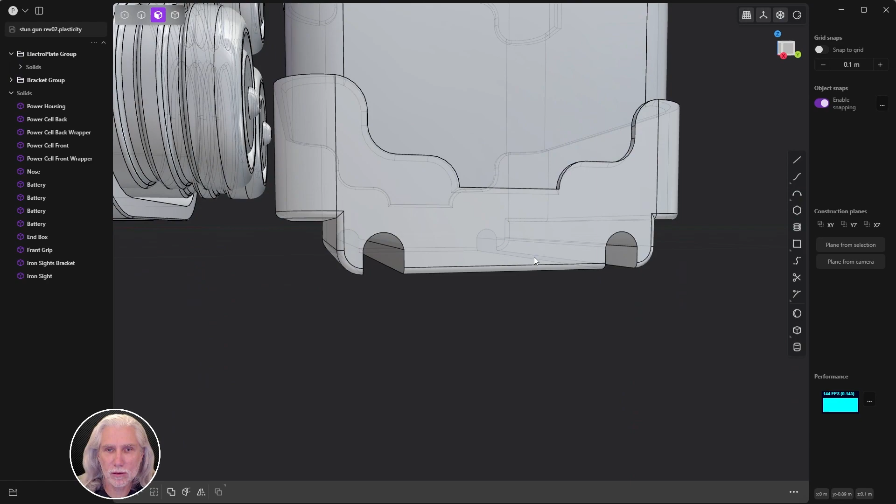I also wanted to—I don't think this is right here. I think this bottom part that's hanging off the bottom should be inset a little bit and not just go straight down. So I'm going to see if I can—let me just save this. Let's see if we can delete some geometry and fix it.

So part of modeling is, especially when it's not procedural like this direct modeling—I don't care if you're in Plasticity or working in Modo, Blender, you're dealing with polygons. You're going to have to delete stuff and redo it sometimes if it's not procedural. So I can't go back in and adjust these things like remove this chamfer procedurally.

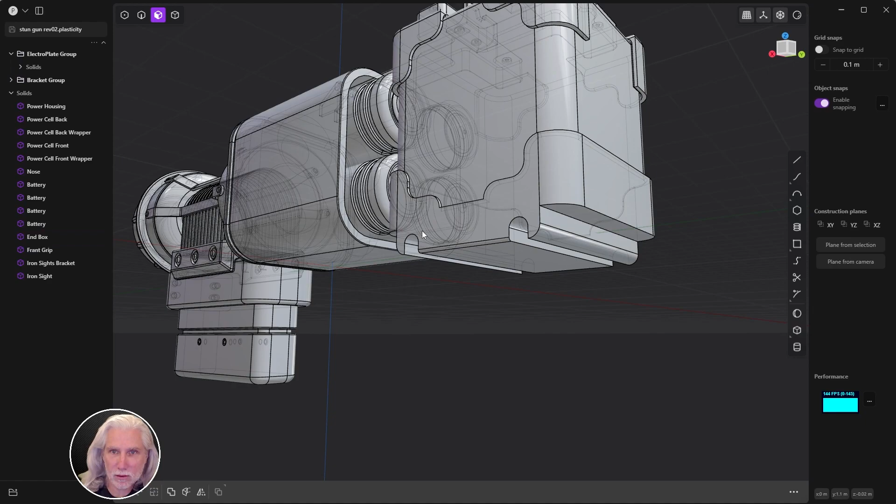I'm just going to have to hold Shift-Alt and select all of these guys. Whoops. Select all of these little faces here, and then I'm going to delete it. So this guy, if you hold Alt and Shift, you can kind of get all those edges at once. Yeah, that looks about right. And then delete—so those are now gone. We just have these hard edges.

And I think I'm going to... let's see. Oh, there's like, okay, there's a fillet here that doesn't exist over there. So let me just select that fillet and delete it.

Yeah, so let's look at it from the side, 3. And then shift A to create a straight line tool, and just click at this corner, it should snap, and then snap at that corner, enter. Now we've got our line here. Shift I to imprint—we're just going to create some control curves essentially around this bottom section. Select our solid to imprint, hit OK. We can delete our line now, and you see we've got this line all the way across here.

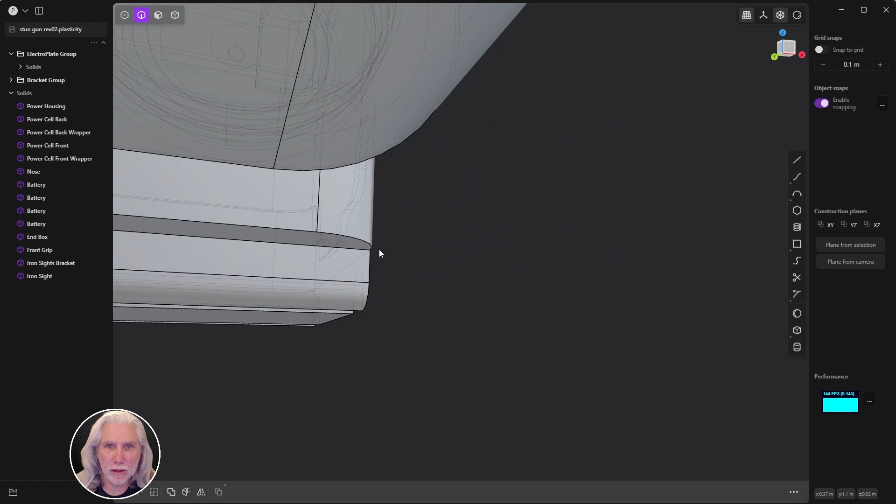And that should allow us to grab, for instance, like this edge here, press G for move, and just move it in. We'll just maybe go 0.04, like that, enter, and then select the one over here, G for move, and then 0.04 as well. Okay, and I think that's a little bit better. So yeah, okay, looks good.

So let's save this, and then we'll move on to the sort of base part, the little rack down here, and then the handle. Yum, yum.